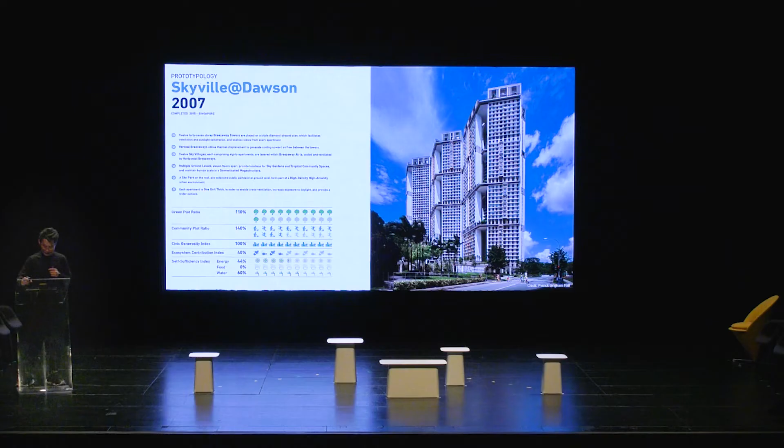Skyville at Dawson is a 50-story public housing project. It is about densification, high rise, high density, high amenity, but also about human scale, focusing on community. Planned 3-dimensionally with a matrix of sky villages and multiple ground levels. On the right, through a series of pictorials, you see how the sky villages are organized. On the real ground level, mature trees are kept as a park. 80 homes, 10 stories, make one sky village. Diamond shape in plan, apartments 1 unit thick, 3 sky villages are connected side by side.

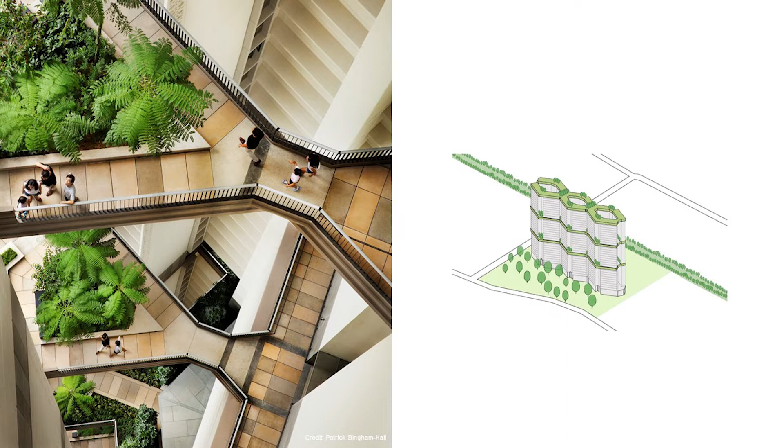Another layer of sky villages is stacked on. The open courtyard of the diamond plan enables a vertical breezeway, which makes it possible to have a vertical hot air movement, effecting good cross-ventilation to all apartments. Yet another layer of sky villages is stacked on. Every row of sky villages is connected, making it possible to have a 200-meter-long sky park, resulting in many different paths you can take to visit your neighbors without ever coming back down to the ground.

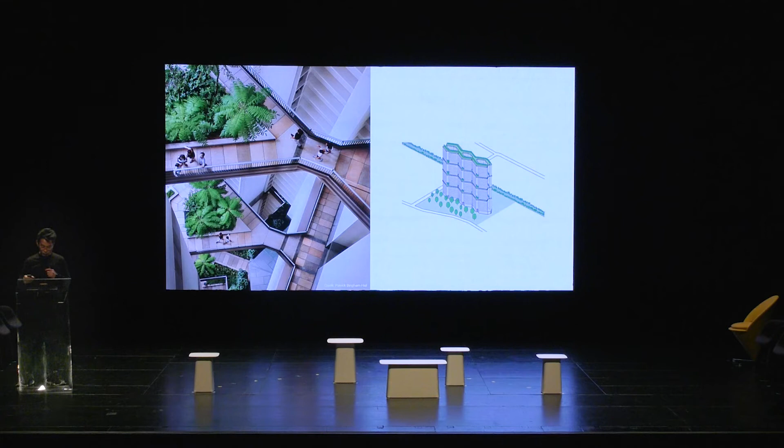The fourth and final layer; in theory, we can keep stacking sky villages and increase density. On the left is a real photograph of the layering of sky parks. On the left is again another photograph of the village green of one of the sky villages. And you can see and hear when you walk home through these linkways to the apartments. On the right is a short section of the building.

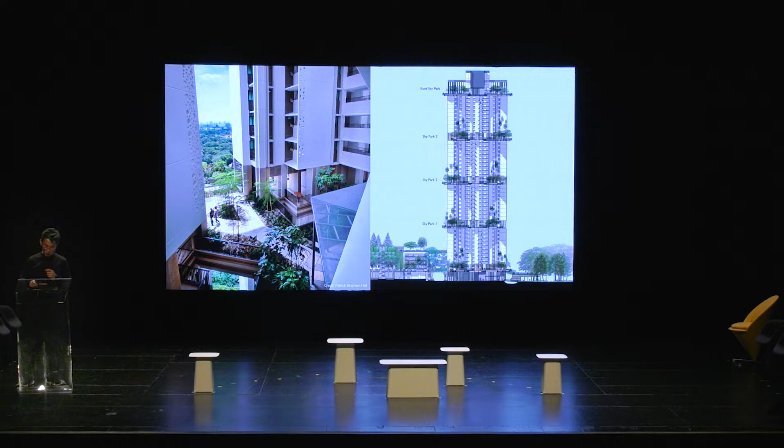Overall, 960 homes, 12 sky villages, a park on the ground level with a neighborhood square, 4 tiers of sky parks, all accessible to the public at all times, including the topmost, which we call the penthouse park for the people. Topping the building is a solar canopy harvesting enough clean energy to power all the public amenities.

Post-occupation surveys conducted highlighted some interesting findings that validated some of these strategies. 18% of savings in energy bills due to the good cross-ventilation, 3.5 times more visitors counted in the sky parks, and 1.3 times the number of neighbors considered as friends.

The second project is Kampung Admiralty. It is another public housing development, but for the elderly with mixed uses. The focus is on the elderly within the community and being biocentric.

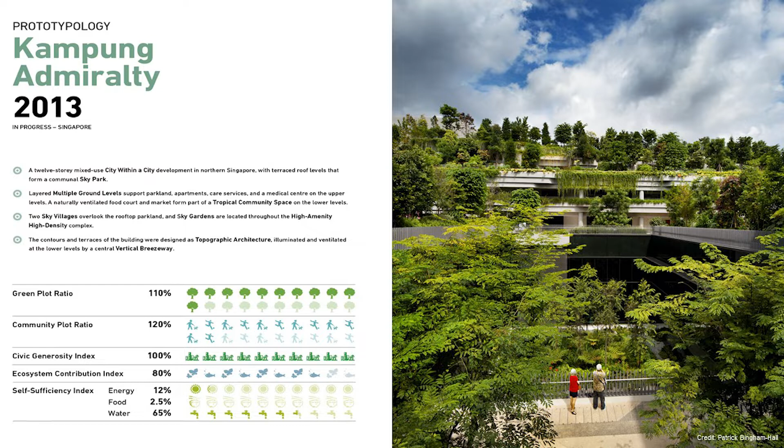It is located centrally in the neighborhood center and connects to the MRT, making it convenient for the elderly to access all parts of Singapore. You can see the MRT on the right and the building stepping up as a park, shielding against the noise from the MRT. We took a club sandwich approach, putting together synergistic outcomes.

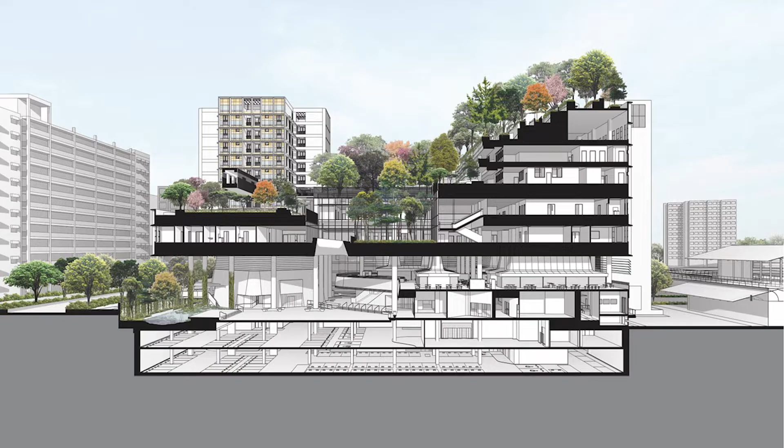First and second level are the covered plaza and the community living room and hawker center as the community dining room. Level 3 to 5, we located the medical center and the first units of elderly housing. From level 5 to 8 is an elevated and stepping park, and within are daycare facilities and amenities for the young and old.

On the very top, a community park, a community farm to encourage an active and healthy lifestyle. The stepping and cascading landscape allows us to implement vertical phytoremediation and detention of rainwater, at the same time creating waterfalls and water bodies for the enjoyment of the users.

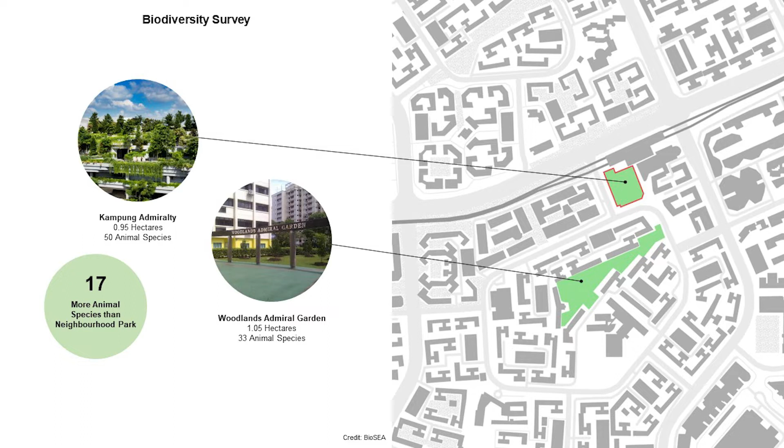What is interesting is that when we conducted a biodiversity survey, we realized that as compared to a park on the ground level, even as a building, Kampung Admiralty has 17 animal species more compared to the park next door.

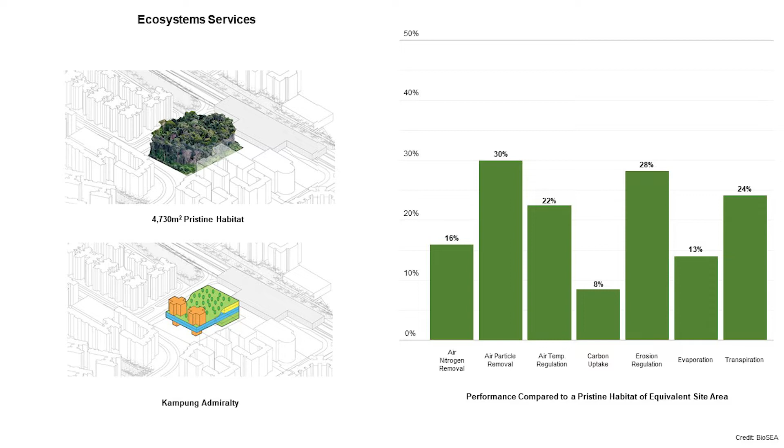And in terms of the ecosystem services, what is also interesting is that the landscaping and the development, even though the building is occupying almost full site coverage, provides about 20% of the ecosystem services as compared to a lowland rainforest, regulating air quality, water runoff, and reducing solar heat. It is hard to describe Kampung Admiralty in totality, but maybe a short video will do a better job.

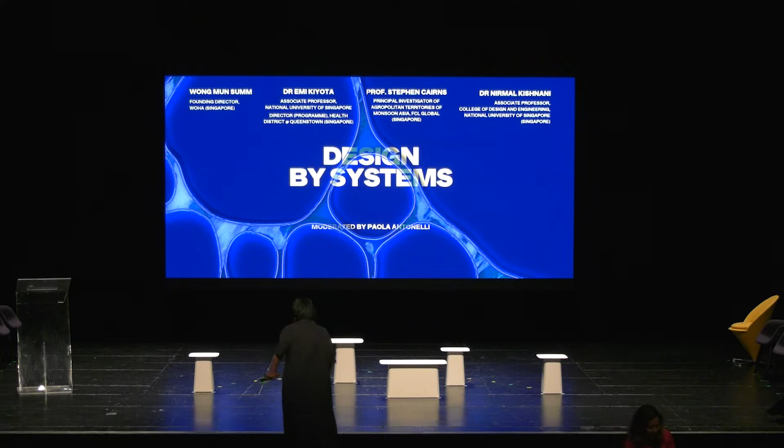Older adults are increasingly being marginalized around the world, even as their numbers are growing rapidly. Too often, aging is viewed simply as a process of decline, the growth that accompanies aging invisible to society. As a result, elders are effectively cut off from the flow of daily life with us, their wisdom and perspective lost to the children and younger adults in their community.

12 years ago, I founded Ibasho, which is a principle-based approach, developed to challenge the prevalent, mostly negative perception about aging by empowering elders to co-create physical places where they can contribute to community members of all ages rather than being taken care of.

So these are pictures that came from projects in Japan, Nepal and the Philippines. When I give a lecture, sometimes people are surprised that I don't have very sad pictures of older people. Because to me, it is a question I try to ask: what does good living in older age mean to you?

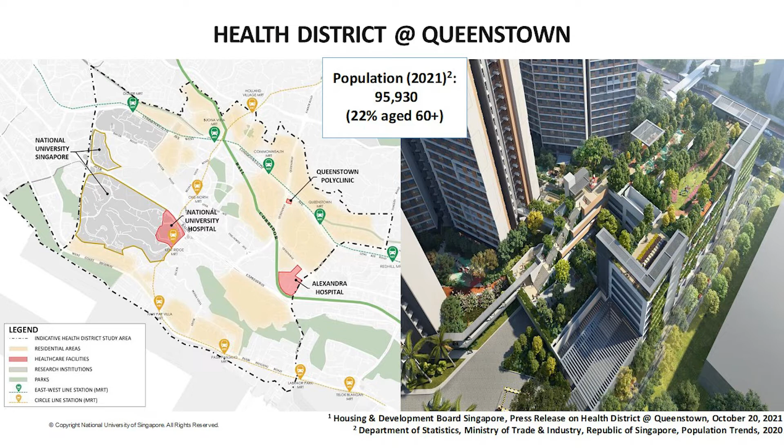So these are the places that we created. This is in Japan. 3 places that I worked with happened to be post-disaster areas. So this is in the Philippines. This is Nepal. So now I'm involved in the health district project in Queenstown. So what we try to do is really bring a co-chair of 3 agencies to bring the wellness rather than healthcare focus.

So I just wanted to bring these 2 slides up to say that integration of agencies is important. But I'd like to leave you with design implications based on my 30 years of design experience. If we just try to design buildings that protect elders, that might create dependency if we're not careful. And if we try to provide special services for elders, that might create ageism. Specially designed services and built environments may create stigma. Age-specific design creates segregation. Excessively convenient technology might create social isolation.

I really like to leave this question for you: how can we design with older people to be able to create the space where we want to age? Thank you so much.

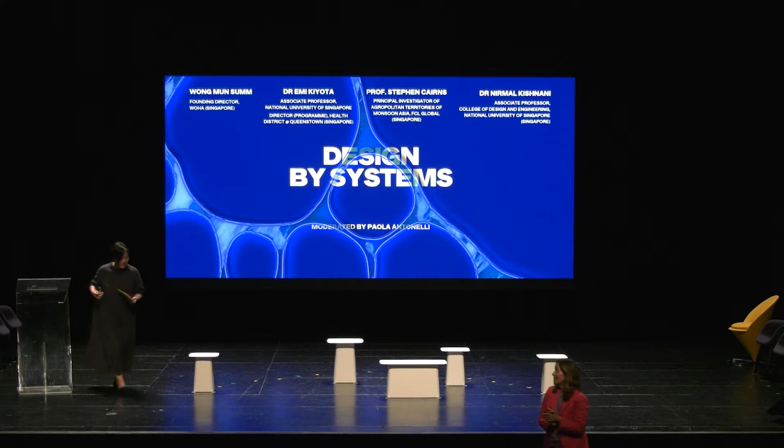My name is Stephen Cairns, and I'd like to bring together 3 main themes in my talk. I'd like to think about food systems, I'd like to think about food waste, and I'd like to think about how black soldier flies, who I'll introduce you to in a moment, can help us in upcycling that food waste. And finally, I'd like to think about those 3 themes, specifically what it means to be in the city.

Designing food future systems. We probably know this already. This is a very significant theme for sustainable cities worldwide, but it has practical relevance right here in Singapore because the Singapore Food Agency has adopted an ambitious and very impressive policy to produce 30% of Singapore's nutritional needs by 2030 domestically.

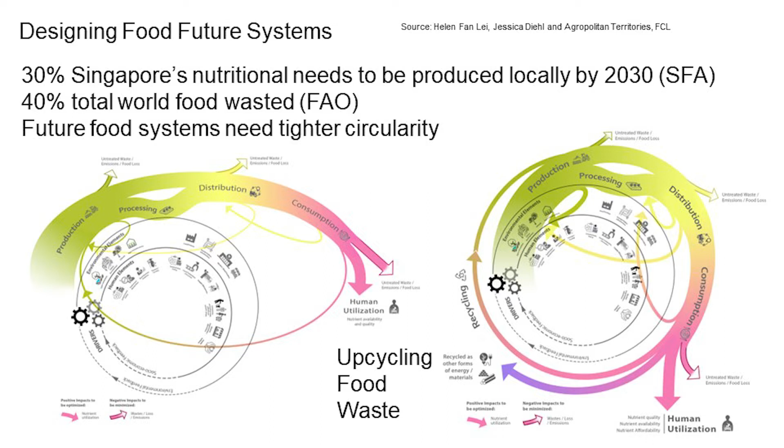This is, of course, the aspiration: how do we close that loop, how to produce that tighter circularity. And what we're interested in is how we can reduce that 40%, but also bring most of that 40% back into one or other of those phases in that food system. A couple of other things to mention while this diagram is up. I said this is very significant for the city, and this is another diversionary footnote.

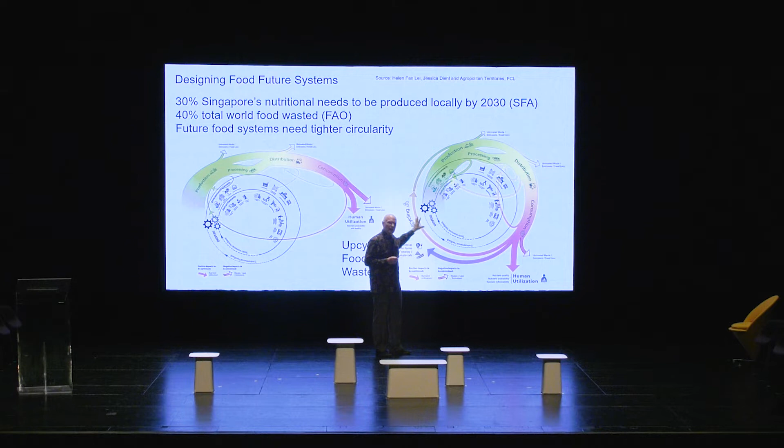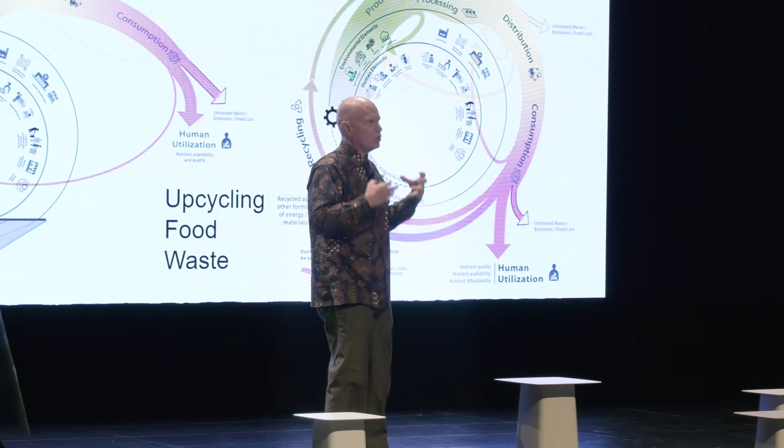In this kind of system diagram, most of this process is happening outside of the city. The production, maybe the distribution is into the city, and certainly the waste. The city is primarily, historically and conventionally a space of consumption. And of course now that's changing because we're thinking about production, manufacturing as well as food back into the city. So most of that's outside of the city, and this is also historically outside of the city, and the reasons are obvious. When food breaks down, it's smelly, it rots, it falls apart, it's unsightly, and in a way, we stigmatize that aspect of food production. So we're very serious about trying to get hold of all of these points in the compass and bringing them back to the city and think what it means to reintegrate those processes into the city.

Now let me introduce you to the hero of my story. This is the black soldier fly. The black soldier fly, I think you'll be pleased to know, is endemic to Singapore, endemic to tropical regions, but doesn't typically interact with human life. So you probably don't see these around your home, but they're part of the fabric, the ecosystem of Singapore. And they're very important because, especially the larvae, as you'll see in a moment, voraciously consume human food and are a really important agent of bioconversion, and therefore become a very important design agent in this story of food system design.

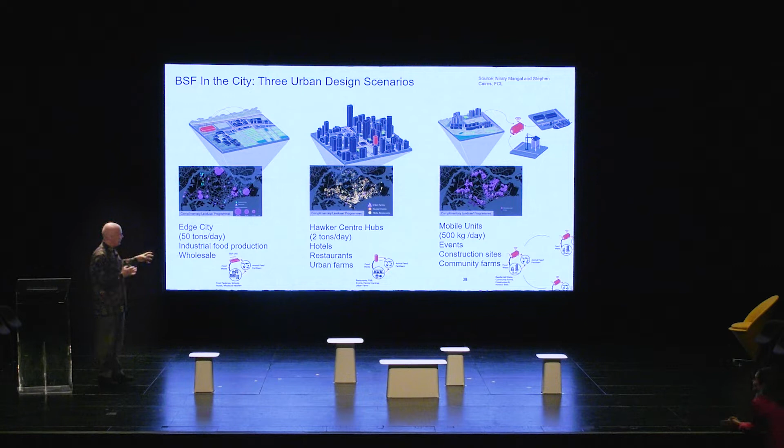Okay, something perhaps a little bit more familiar to you. As I'm an urban designer and I'm working with a number of colleagues, we would like to think quite practically, what do you do with that? What do you do with that process in the city, given that we know theoretically it's very, very important and very, very valuable and directly relevant to the policy aims of the Singapore Food Agency? So the first thing we'd like to do is to think about the conventional model. This is on the edge of town. This is the massified condition on the edge of town. Very effective, already being done, but probably most conservative.

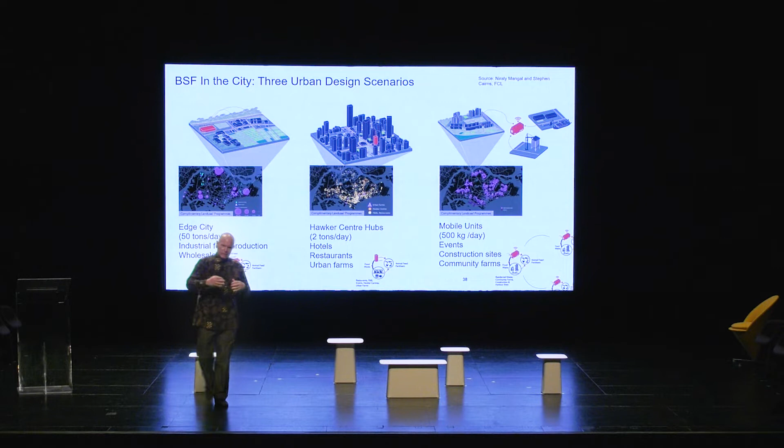The second, what if we brought those black soldier flies to hawker centre sites of existing production, existing consumption of food? This is a super interesting possibility, I think. And then finally, what would happen if we distributed the black soldier fly facilities to sites where food will be consumed on occasion, special events, special sites, for example, through the life cycle, the seasonality of the city. So these are three different models that we're working on.

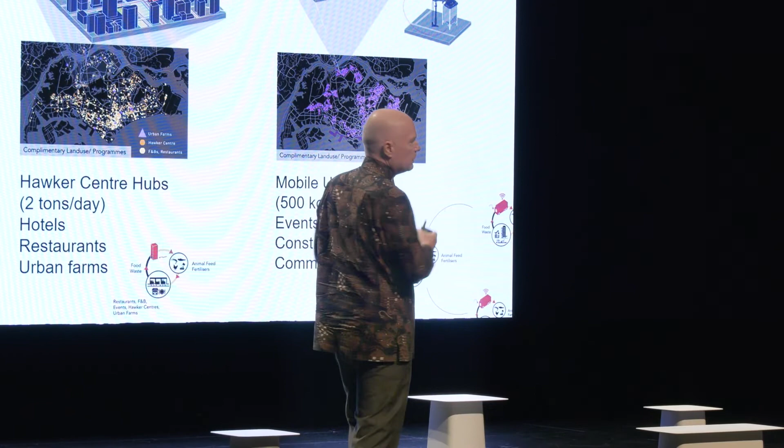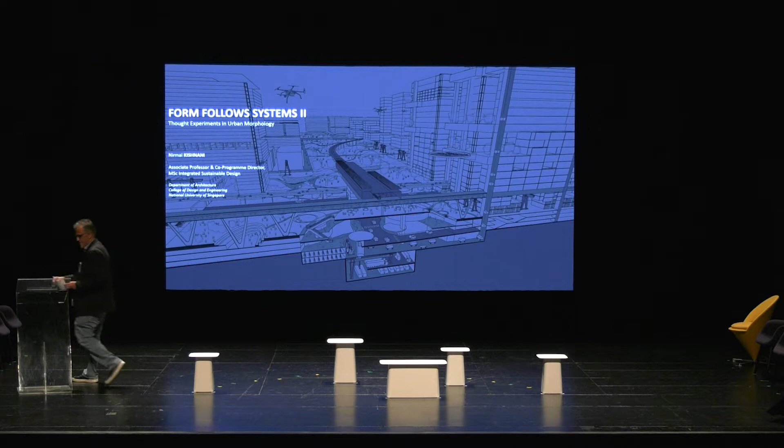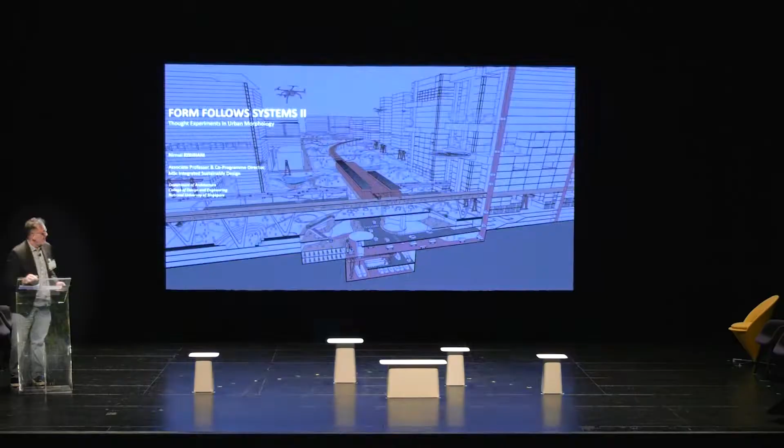I'm going to pick up very quickly from where Mun Summ left off. He talked about systems thinking and 3D planning at the building scale. I'm going to talk about that speculatively at the urban scale. Mun Summ and I are co-program directors of the MSc program in NUS. The focus in the program is design research. We explore better structures of relationships wherein many systems, energy, water, mobility, operating at multiple scales, function together in a mutualistic manner. The research looks at systems thinking in the context of Singapore, where it's applied to land use and planning. So we ask, what do words like resilience mean? What is the role of architectural form and urban form?

I'm going to illustrate this with the Sungai Kadut Industrial Estate, which is an aging estate to the north of Singapore. This study was sponsored by JTC Corporation. So the questions that we asked relate to densification and land use, integration of new industrial processes and business models, but also how to facilitate circularity, a topic that's come up more than once today. So we start at the scale of the building, the vertical stratification of programs and systems, what Mun Summ called 3D planning. Here is a typological exploration, not unlike Kampung Admiralty, only maybe bigger.

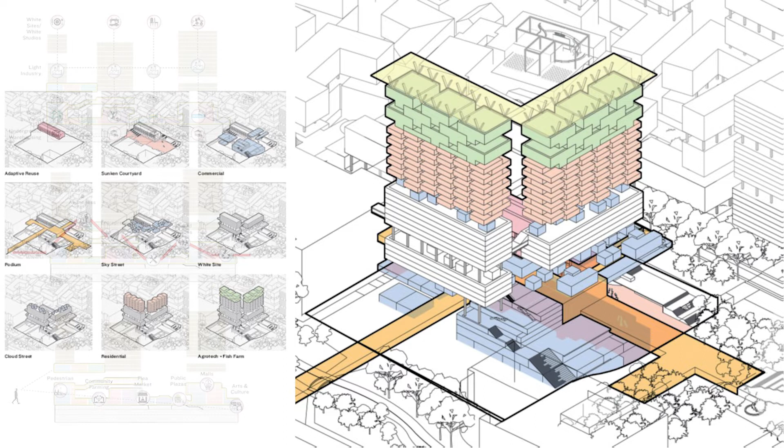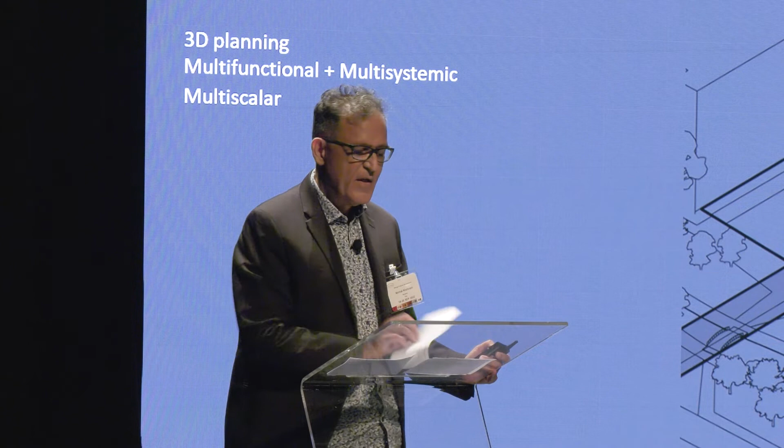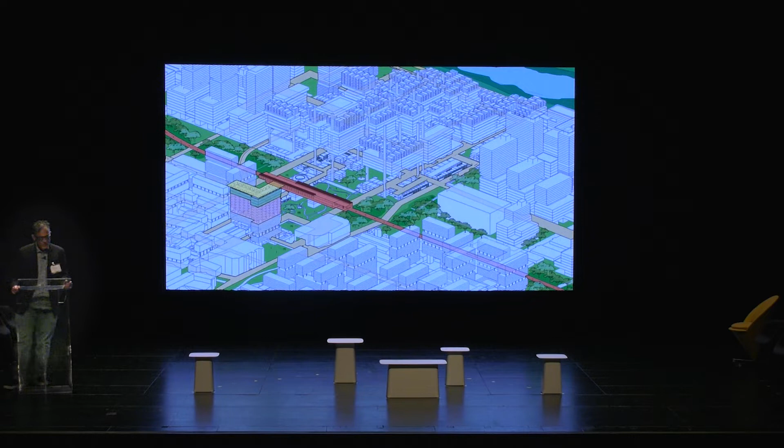What if we extend the 3D logic to clusters of such buildings? Well, several things start to happen. We see new urban connections on the ground, below ground, above ground. We can also aggregate productive surfaces for food farms and solar canopies. And when typologies jump scale, when many buildings connect to form urban networks, we see the emergence of new forms at the urban scale. This idea of stratified connectivity is certainly not new. We see it in cities like Hong Kong and Tokyo, which have evolved over time, often organically. The question here is then, what value can we extract that relates to circularity and resilience?

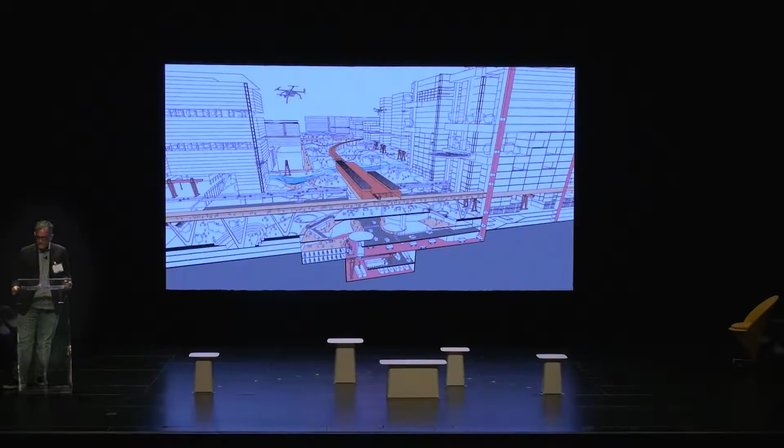Land scarcity is very much part of the narrative in Singapore. But what if planning were more multifunctional and multi-systemic? Interestingly, mobility becomes a key to this question. Seen here is the linking of horizontal lines and the vertical, such as lifts and mover systems. Urban form begins to look like a 3D matrix, the segregation and intersection of vehicular, logistical, and pedestrian pathways. Here, the ground is freed up as a contiguous public and ecological space.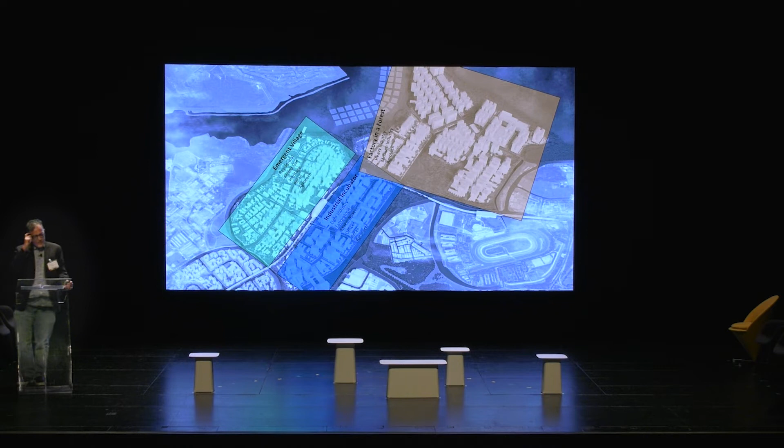The Sungai Kadut Master Plan was, of course, guided by a wider land use strategy. But in this union of form and program, we had discussions on circularity because resource flows, much like mobility, must operate at different scales. I will illustrate this very quickly with one system. At the building scale, water is detained and recycled. These processes deploy both equipment and landscapes.

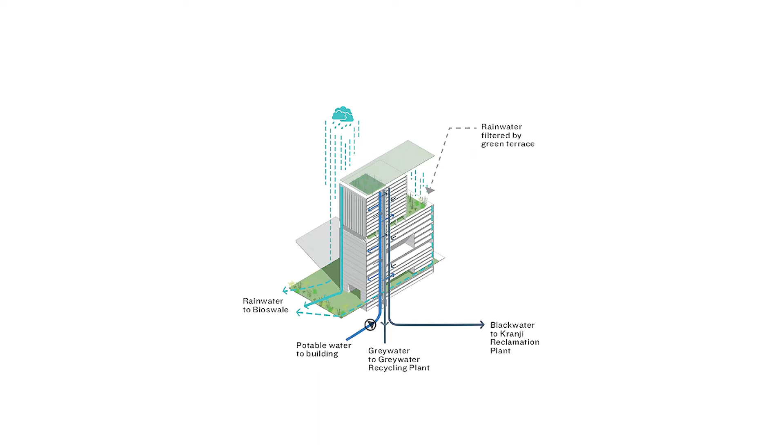To manage deficits and excess, the building is connected to the neighborhood or to the master plan. At the neighborhood scale, we discover new economies of scale. Grey water treatment, for instance, makes more sense here than at the building scale. At the master plan scale, we have even larger features and elements, such as water reclamation plants. Interestingly, these can now integrate with natural systems, such as reservoirs, wetlands, and mangroves.

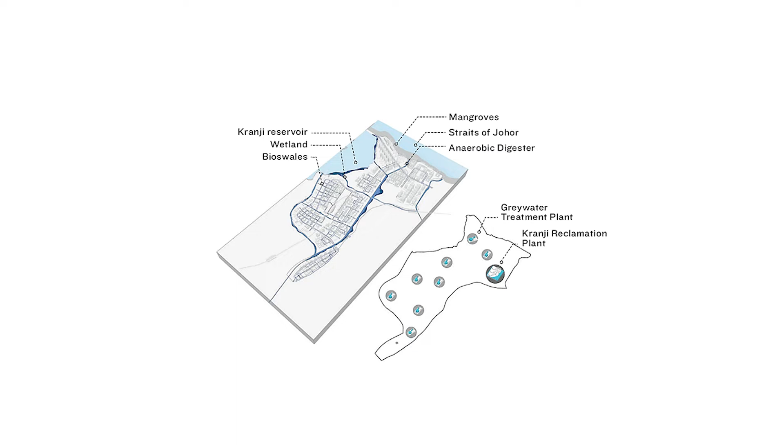What we're seeing here is the emergence of polycentric hybrid networks, wherein production and consumption are close to each other, and nature is co-opted. Polycentric networks are, by definition, more resilient, better than monocentric systems. When water, for example, is channeled to several large treatment plants in the monocentric systems that we have in Singapore, for instance, the city becomes more vulnerable to disruption. So this underlying principle of polycentric and circular flows can then be applied to other resources. These nodes and pathways are integrated into the urban form. Some elements happen at the neighborhood scale, others at the master plan scale.

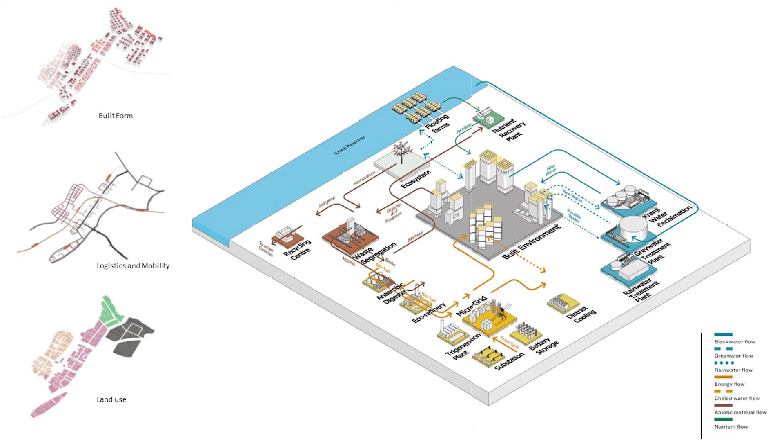Singapore's view of urban nature, after many decades of being a garden city, is very anthropocentric at heart. We plant trees because they make us feel better. They make our cities more livable. Now, there's nothing wrong with that per se. In fact, one could add to this ecosystem services wherein nature is harnessed to make cities function better at little or no cost. Now, Sungai Kadut, for example, sits at the crossroads of very important natural areas which have been fragmented over time. There is already an ecosystem canvas here.

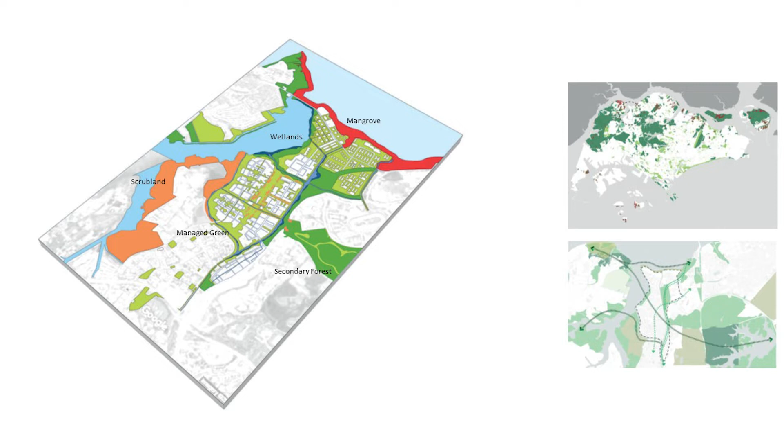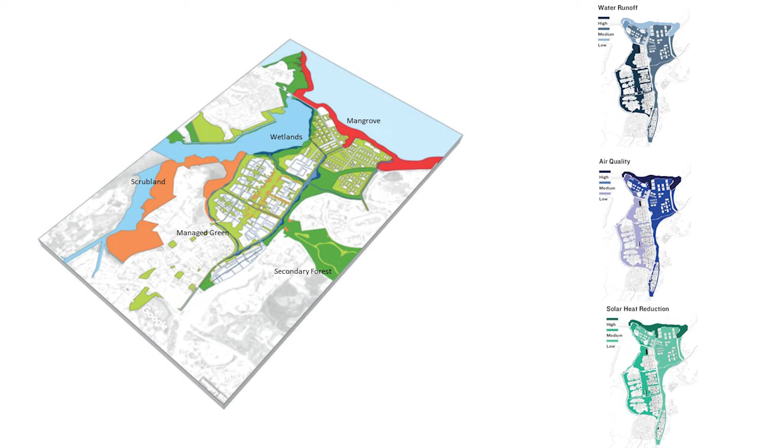When the conversation shifts to the question of repair and regeneration in Singapore, it must confront the land scarcity question. How will we pay for this? Here is a comparison of ecosystem services that this landscape produces: water runoff, air quality, solar heat reduction, all with the help of blue-green systems. The proposed master plan is significantly better than the existing condition. Also, it anticipates the effects of global warming, such as extreme heat and rain. So why wouldn't we want to work in an industrial area that looks and behaves like a natural ecosystem? Why not a waterfront park next to an agri-tech district?

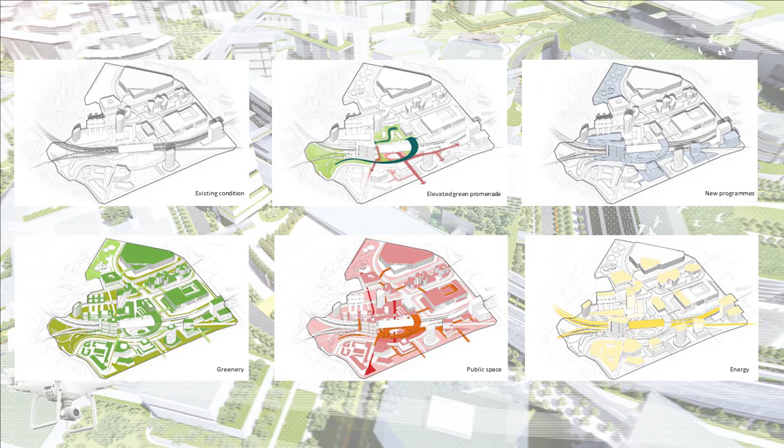This idea of win-win planning has been tested in our studios in various locations across Singapore. Here is a proposal for a retrofit for Jurong Gateway. We are finding here, as in many other areas that we've studied, that a district can easily achieve autonomy in water, can be pushed to produce at least 50% of the energy that it needs, and grow more than 100% of all leafy vegetables. In the process, interestingly, both public space and green cover more than double. So that, of course, leaves us with the question, why aren't we simply doing this? And that perhaps could be a question in the panel discussion.